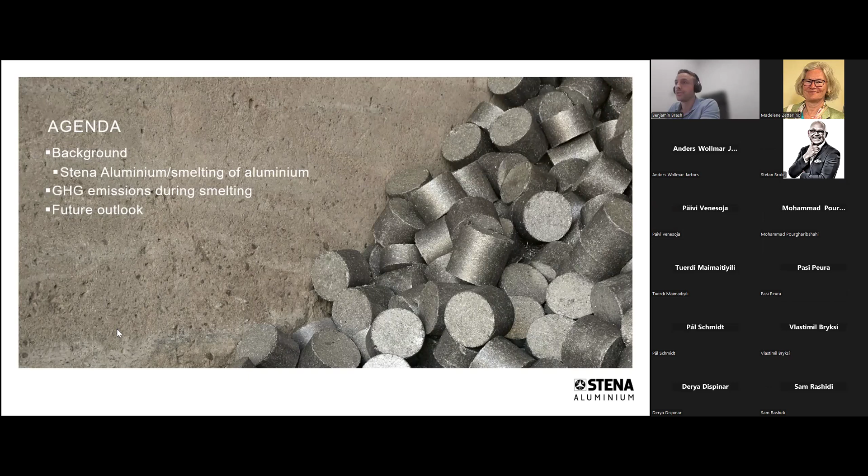First heading into the background, very briefly about Stena Aluminium. Stena Aluminium is situated in Älmhult, in the southern part of Sweden, on old industrial grounds, you could say, so there's been business here for a long time. It was founded already back in 1906. Back then it was not aluminium, it was recycling of textiles and other materials, but it's been doing aluminium since 1949, so also quite for a long time.

It has not been owned by Stena during this whole time. Stena came into ownership roughly 20 years ago, and of course it's part of the Stena sphere, or the Stena group, which also consists of Stena Recycling, which I think many of you are familiar with, but also Stena Line, the ferries, also part of the same group. Stena Aluminium has roughly 100 employees, only one production site here in Älmhult, and that's where almost everybody is situated as well.

What do we do? We do scrap-based production of ingots, which we supply mainly to foundries for high-pressure die casting, but also sand and permanent mold casting. We have an annual capacity of around 70,000 tons, looking to increase this in the upcoming years. We have a permit allowing 90,000 tons annually. Currently at 0.63 kilograms of CO2 equivalents per kilogram produced aluminium, and we will go much deeper into that figure in the upcoming slides, but that's the average value for the whole production.

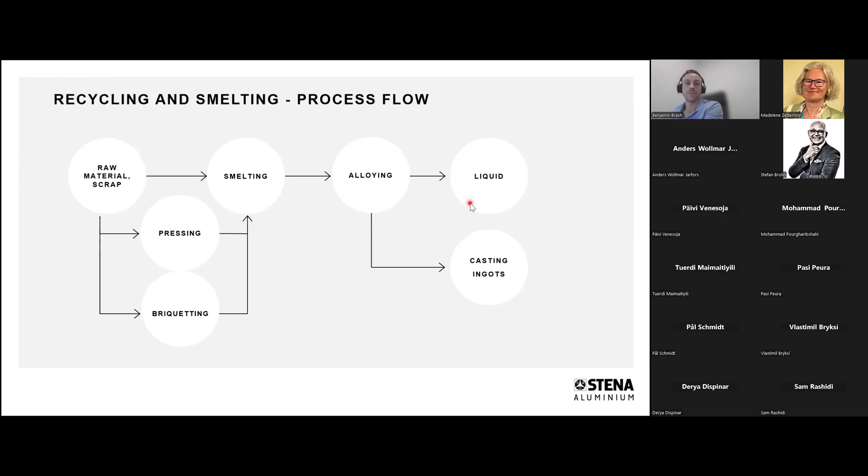We then supply material, as I said, as ingots, so we do casting of ingots. We also have liquid delivery in ladles, and that is also a way to reduce greenhouse gas emissions. It's something that we have, and also some of our competitors down in Germany and Poland. It's quite common to have these kinds of liquid deliveries as well.

I should also say that we do not do so much sorting at our facility. We purchase the material, and it's usually already sorted into different fractions. We purchase the main proportion of our material from Stena Recycling, so it's within the group.

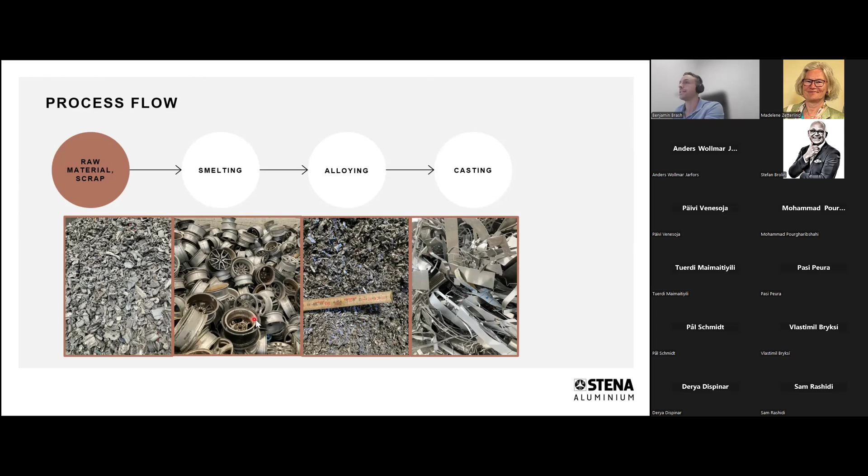So looking more into detail of the alloying step, we need to do alloying, as I mentioned, and it depends on what the customer wants, the alloy spec that the customer wants. It also depends on the scrap mix that you use, because in the scrap mix you start with an alloy composition or a scrap composition, and then you often need to add some alloying elements. It will depend both on what the customer wants and on your base scrap composition.

We do mainly alloys for casting. As I said, high pressure die casting is the main proportion, but also permanent mold and sand casting, supplying to foundries. There you have quite high silicon contents, usually in the range of 7 to 12%, I would say, so quite a lot of silicon. Silicon is also the alloying element that we add in the largest quantities.

Why do you need silicon? Well, during the casting process, you need silicon because you need to have the fluidity and the castability throughout your mold during the casting process. That's why you need these silicon contents.

So looking a bit more into detail of the greenhouse gas emissions during the recycling and smelting process. I should say that we have calculated here according to the greenhouse gas protocol, and I know this is quite a tricky field, there's a lot of different ways of calculating, different standards. But we have chosen the greenhouse gas protocol to calculate our emissions.

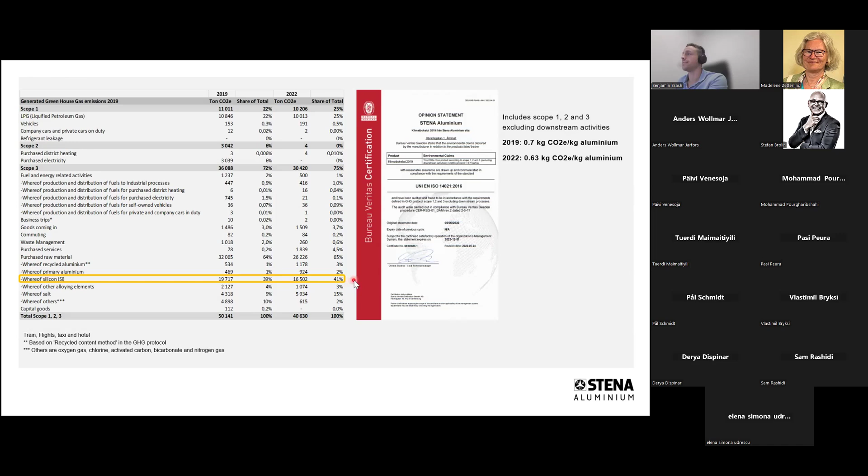And where does those 41% stem from? As I said, this is scope 3 emissions, so they are not emissions which occur in our plant, it's during the production of the silicon. I should say that we also use quite green silicon, there's of course a variety here depending on where you source your silicon. But it's still quite substantial.

And where does it come from? It's scope 3 emissions. So when you produce silicon, you start with quartz or silicon dioxide, and then you have to reduce this with a carbon source, and then you get silicon, but you also get carbon monoxide and carbon dioxide, and that causes the emissions. There's also, of course, an energy consumption within this reduction process. I believe it's usually electric arc furnaces, so there's also energy consumption there, and that you can solve by using green energy, but the reduction process itself is a bit more tricky to solve.

There's also an effect on the scope 1 emissions, because if we add more alloying elements and more silicon, we need to use more LPG during the alloying step in the alloying furnace. So there is actually also an effect on the scope 1 emissions, but I would say the substantial part is within the scope 3 emissions during the production of the silicon.

But anyway, when we calculate the total, we get a figure of 0.63 CO2 equivalent per kilogram of produced aluminium. So it's fairly low, and I think usually when you look at these figures from recycling smelting facilities, they are usually somewhere in that range between 0.5 and 1.

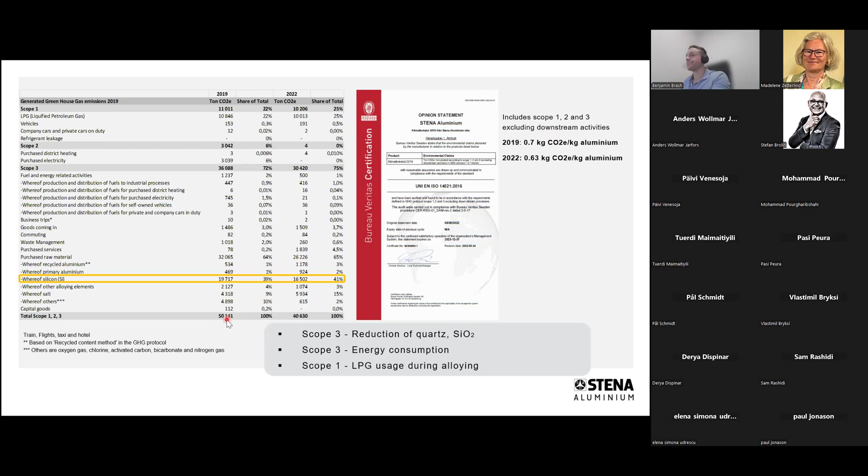So what we have also looked at is the difference between different alloys. As I said, we've supplied foundry alloys, but there's a lot of different foundry alloys. So it's interesting for the customer and for us to know what is the recycled proportion in the different alloys. Here we have listed a couple of different alloys and alloy groups.

Basically it goes from the copper silicon alloys, that's for instance the 46,000 alloy. That is, I would say, the most common foundry alloy today. And there you have a 96% recycled content, meaning that it's 4% primary alloying elements that you need to add.

Or that we add in when we produce this on average. And then it goes down in the lower copper content containing alloys. So this half silicon is, for instance, the 47,100, it's 93%. So the recycled rate goes down a bit, and we have to add a bit more of the primary alloying elements. It's the same 93% figure for the 44,300 alloy, which is also quite common.

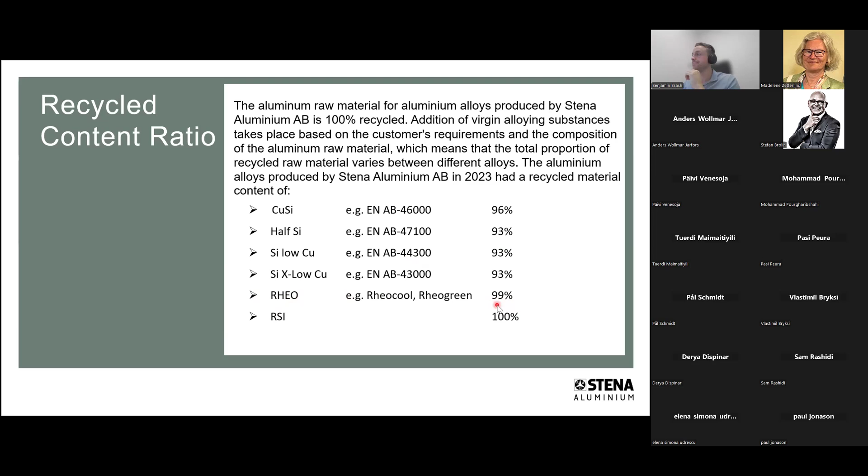We have also recently developed these RHEO alloys, and there's a slide with more details about the RHEO alloys. There we have very high recycled content, so basically we have to add very, very small amounts of primary alloying elements. That's how it looks when we look at the different alloying groups.

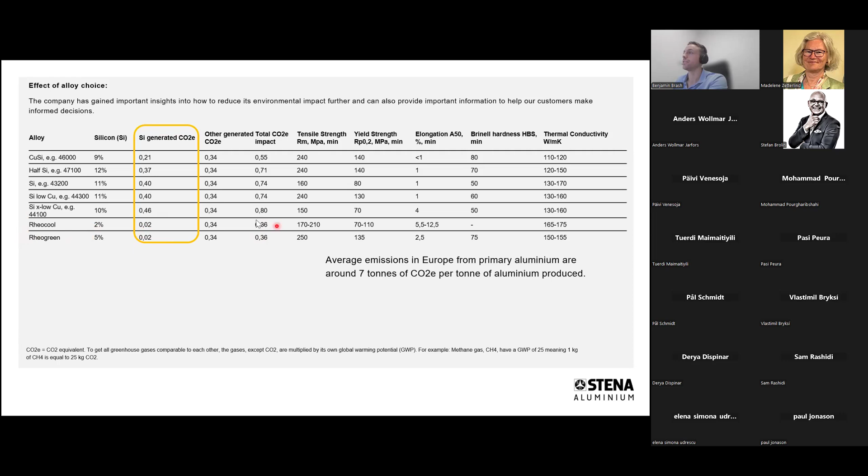So what have we done, and what is possible to do to reduce these alloying greenhouse gas emissions? Well, the first step is, of course, to generate this kind of data to be able to make an informed decision for the customer, but also for our sake, to know what are the emissions in the different alloying groups. So the generation of data is the first step.

Scrap recipe optimization to reduce the need of alloying. When we produce, as I mentioned, we have a lot of different scrap types. By choosing this wisely and combining the correct type of scraps, we can try to get as close to the final alloying composition as possible when we choose these different scrap types. This is something we have worked with for a very long time, but always trying to improve and get as close as possible to the final alloying composition, using only the scrap.

As I mentioned, RHEO alloys with low silicon additions—these are alloys with, as it says here, 2 or 5% silicon final content. So it's very low, meaning you don't have to add basically anything. Very low amounts of additions, which also means low total emissions.

Circular material flows is something talked about a lot, and we are working with circular material flows as well, these kind of closed loop solutions, and we're always looking for more of those solutions. What's important to mention is that even though we are working with a lot of these closed loop solutions and circular material flows, there is a supply and demand mismatch when we look at the silicon addition.

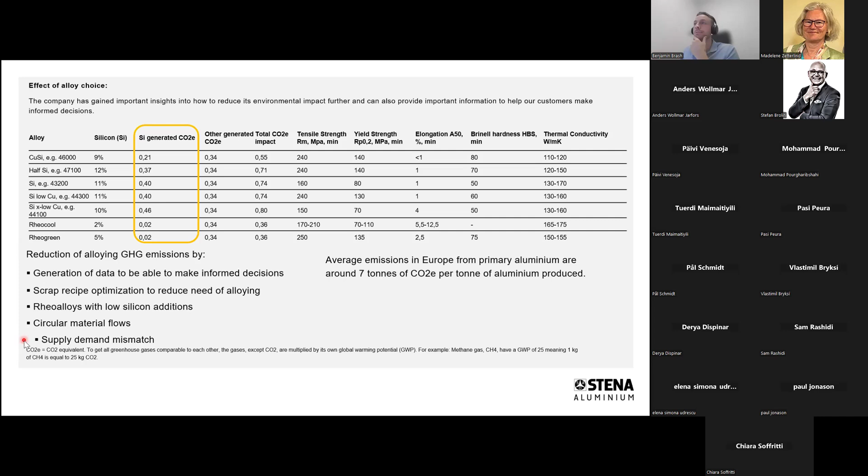Just a short slide with some information about RHEO alloys, since it's maybe not something everybody is familiar with. In short, Rheocasting means it's a semi-solid casting process where you're using a slurry when casting, and this allows for a very low silicon content. Usually you go between 7 and 12%, but with Rheocasting it's possible to go much lower, maybe 2, 3, 4, or 5% silicon, and it's still castable. That means very low silicon additions are needed, so significantly reduced need of alloying.

At the moment we have two RHEO alloys that we've developed, and we're looking at developing more. We have Rheocool, which is basically for thermal management—it's very low in a lot of the alloying elements, meaning good thermal properties. Rheogreen is more of a replacement for the 46,000 alloys, and it contains some copper.

This process has numerous advantages, of course. Two of those being increased tool life, and also the possibility to cast with a reduced machine size. So there are economical benefits to the process as well as technical benefits.

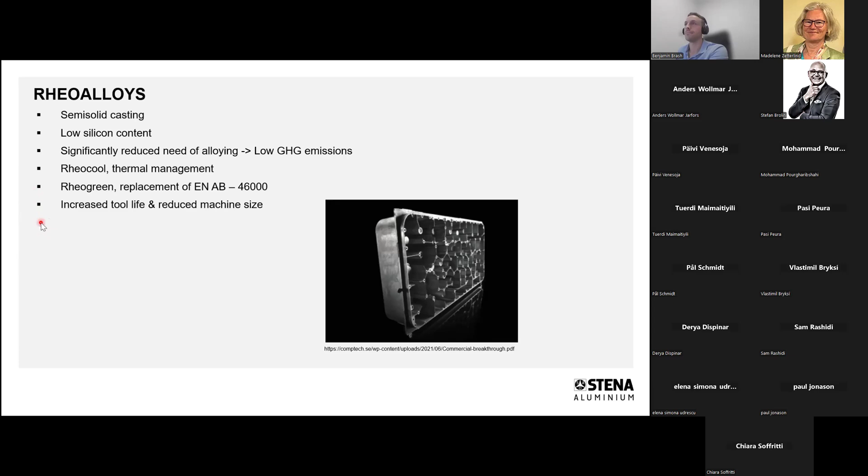So, briefly, let's also look at the future and what it holds. There's obviously a lot of aspects affecting the need for alloying, the main one being supply of scrap—how much scrap is available on the market, and what's the composition of those scrap types available on the market. One thing which affects this is the lifespan of products.

Aluminium is quite good in the sense that it's very durable, and if you look at the automotive sector, we have quite long lifetimes for the product. But that also means, for instance, a lifetime of 15 years for a car means that the scrap from the automotive sector available today is actually the volume that was produced 13, 14, 15 years ago. The demand for products and alloys is, of course, also important.

What kind of alloys does the customer demand today, and what will they demand in the future? I think Anders will talk much more in detail about this demand question, because it obviously affects what kind of alloys and alloying additions we need to do. The share of material being recycled is also important—we have quite high recycling rates of aluminium, and it differs a bit by sector. But can we increase this? That would be good, of course. Legislation and policies as well.

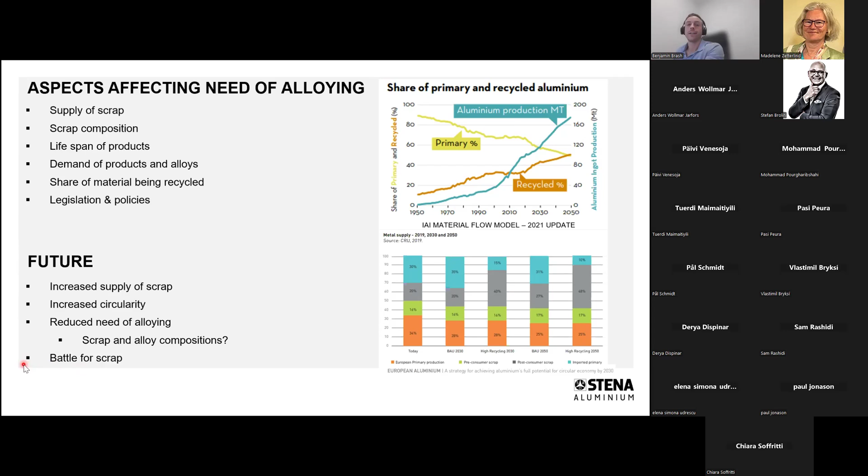So what will happen in the future? Most likely there will be an increase in the supply of scrap, which is what these figures show to your right, along with increased circularity, which is talked about a lot. Will there be a reduced need of alloying? It will depend on the kind of scrap available, and also what alloys are actually requested by the customers. What we are definitely seeing already is that there will be more of a battle for scrap in the future, since a lot of primary producers are also switching over and looking at more secondary-based products.

So how will we move to increased circularity and an increased supply of scrap? There are a lot of things brought up in the circular aluminium action plan from the European Aluminium Association—circularity, making it easier to identify materials when recycling, easier disassembly. Improved collection and sorting is talked about a lot, meaning you can separate these different scrap flows into more specific alloy grades. There's some scrap being exported today, but that will most likely change in the future, keeping scrap more in Europe. Alloy development is also important—Rheocasting is one route, but also making more tolerant alloys that can use a broader scrap base.

So just a couple of conclusions. A significant proportion of the emissions during the recycling and smelting of aluminium stems from the primary alloying elements, as we've seen, mainly silicon. The need for these primary alloying elements and the greenhouse gas emissions will depend on the scrap used and the alloy being produced, and we're seeing some differences between alloys. RHEO alloys have been developed with the lowest greenhouse gas emissions, at least in our product portfolio. And we're seeing an increase in the share of recycled material and recycled production in the upcoming years, at least according to these predictions.

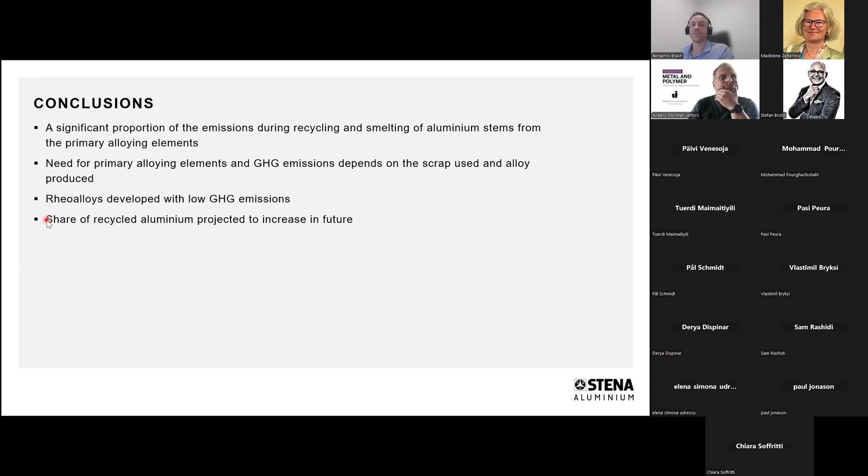Thank you very much, Benjamin. That was a very, very interesting and very good talk, and it matches very well with what I'm going to talk about. Thank you. I presume that you can see my screen now, or at least very shortly.

Yes, you can see it perfect.

I will present work that we've been doing here at Jönköping University, together with my colleagues Toni Bogdanoff and Lucia Lattanzi.

The topic is functionally integrated castings for body in white applications and the consequences for material use and mix in automotive manufacturing. What I'm going to cover is a review of aluminium usage in the automotive industry.

Thinking about Benjamin's presentation and the scrap sorts shown in the beginning of his talk, the leftmost image showed the Zorba scrap being sorted into the aluminium fraction, and that first fraction, the automotive part, essentially ends up being the body in white and some other elements.

What we will do is take a look at that portion of the material and examine the consequences for electrification and for the use of mega casting, because there is a change taking place in material usage.

As Benjamin said, we have a scrap mix today, and what will be needed now and going forward is different, and what will be returned is also slightly different.

So we are looking at the automotive sector and that portion of the material flow, taking a global perspective, and looking in Sweden, we have rather large efforts in this activity.

There are new foundries being set up with an annual requirement in the order of 55,000 tons per year, so it's a rather sizable effect and consequence from the automotive industry on material circulation.

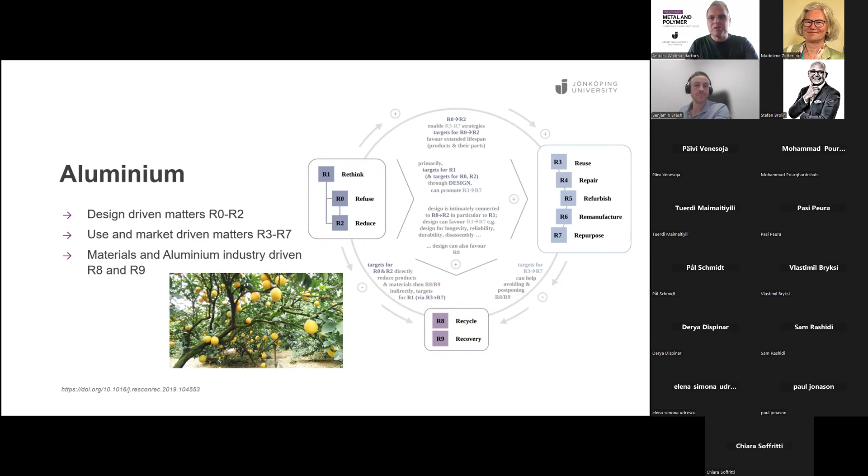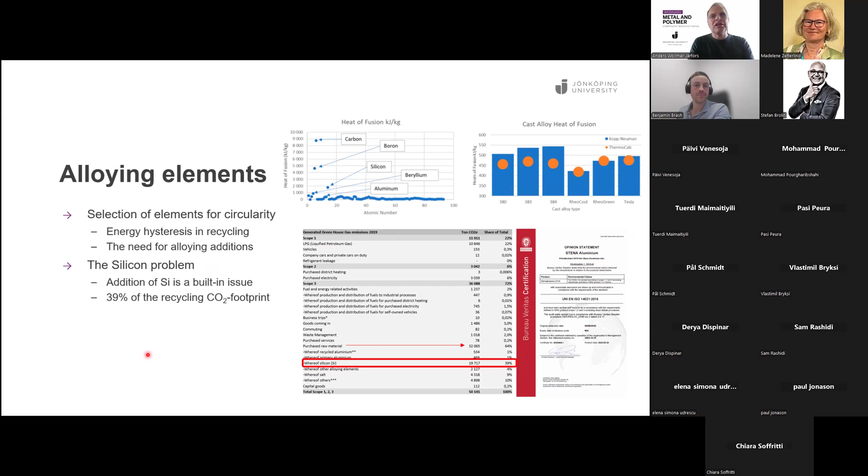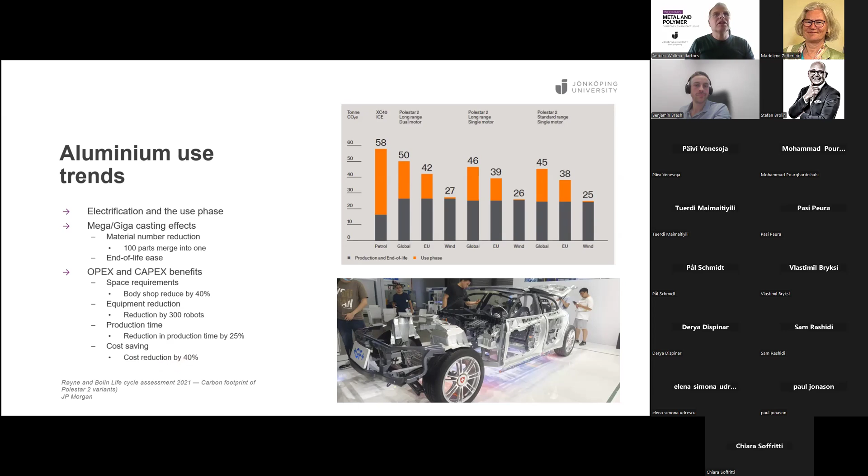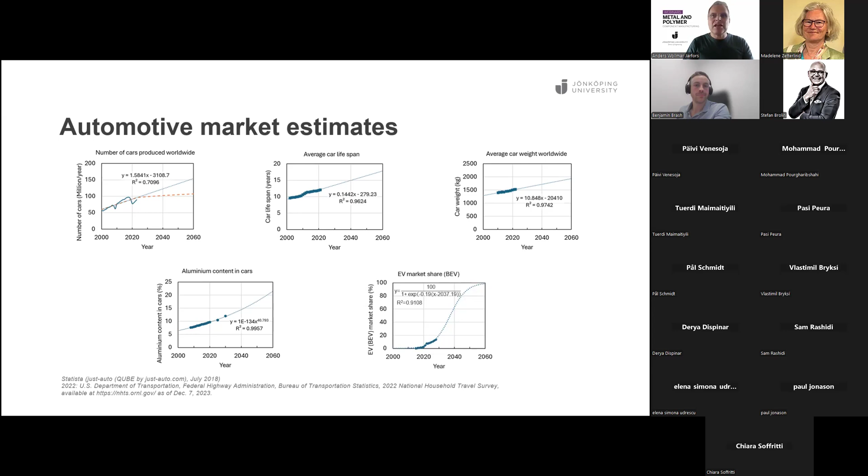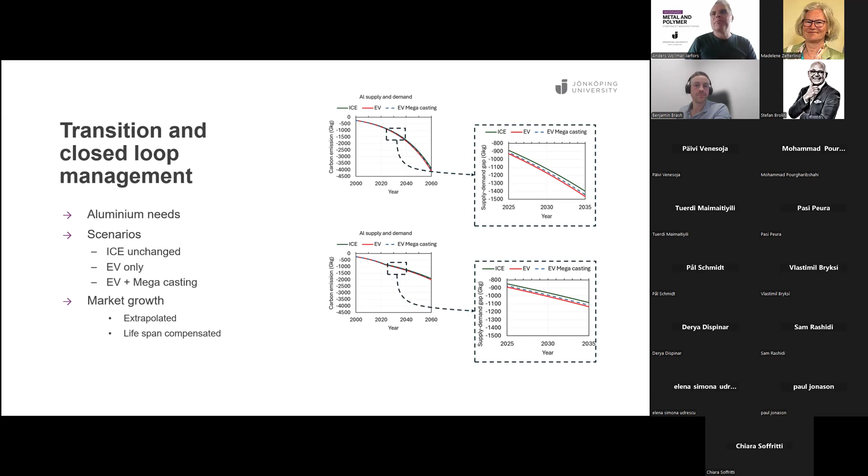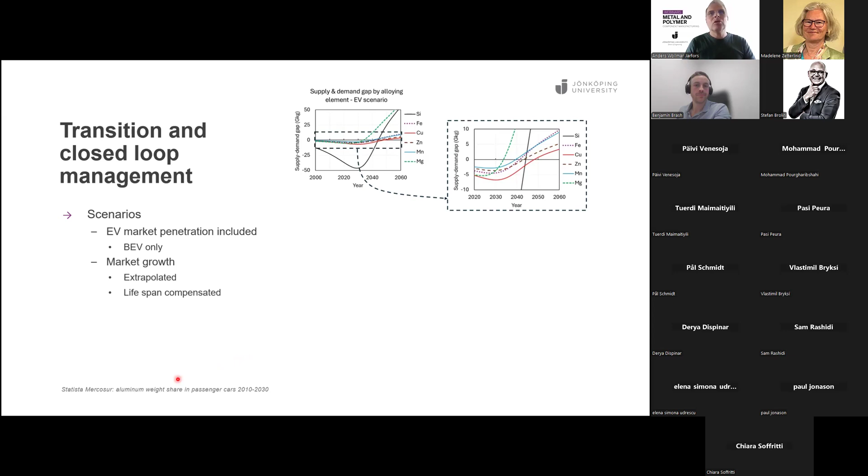Because if you can match your alloys, which is one of the challenges Benjamin mentioned, you would actually have enough alloying elements in the scrap coming back. You would only have to work with that mix and add aluminium in the right proportions. But that requires enough understanding of what actually comes in, how it's sorted, and what we can achieve with that mix.

So how good are we in using the scrap in the mixture? We can take the next step also, which is when you reduce the requirement of the cars, the lifespan compensated part, it's essentially the same scenario, but the drama in the transitions is not as big because the volumes are less. So now being able to use the scrap...

The electric vehicle uses quite a lot of sheet metals and extrusions right now, and that is a challenge when you do recycling. The ability to match is much more difficult with wrought materials, because of the manufacturing processes, which are much more sensitive to variations in chemistry. So if you think about the actual matching, the addition of mega casting would make this transition a little bit easier, because the casting processes are more forgiving when it comes to alloy variations, and the productivity in the process is not as sensitive as an extrusion process or a rolling process would be.

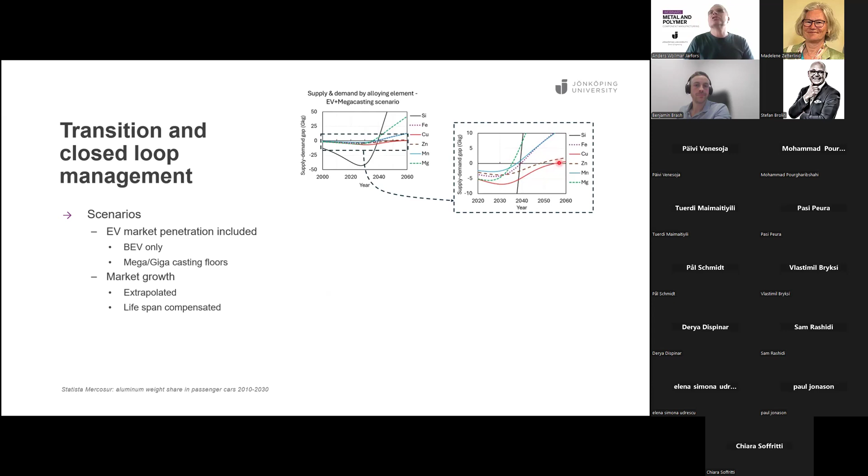Now, taking the mega casting into account, the scenario is the same. There's a little bit of a difference, because the balance and the feedback of silicon will be higher further down the stream, since you have more scrap with higher silicon contents. But it's essentially a similar scenario: starting with magnesium, then manganese and silicon and iron transitioning here, where you will have an excess of that. The alloying elements further down are zinc and copper, which will be the last ones to transition into a surplus. So that tells a little bit about what type of alloying elements we will have.

And if you reduce the growth of the cars, it's similar, because the actual way that things are changing is not as dramatic. You can see there's a little bit of a plus just around 2040 sometime, where all the changes take place. Now, all these things have consequences.

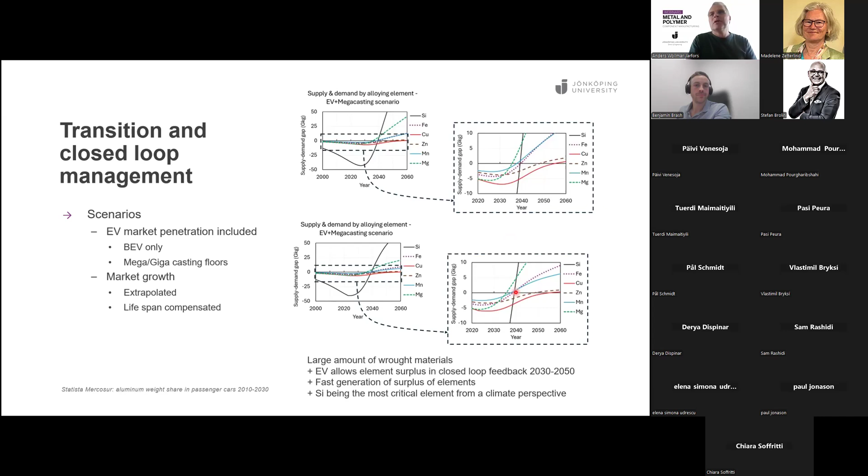With the continued growth of the cars, you can see that the electric vehicles will change, and this will sort of reduce it. Then if you add on mega casting, because you come into balance a little bit earlier, we end up with this type of scenario here. So just before 2040, we will be able to remove and change this. So these are the happy points here.

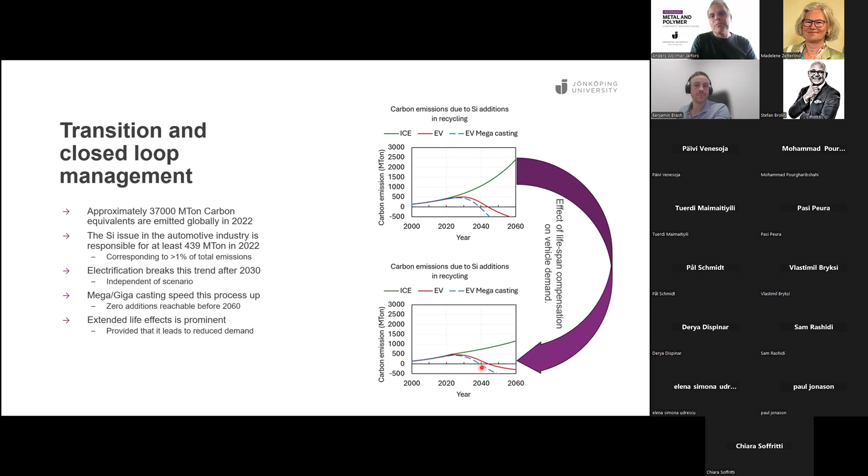Taking the slightly reduced market change, we can see that the amplitudes are lesser, but it is obviously possible to come to this negative portion here. So there is a potential solution to the silicon problem in the automotive industry, and there is a potential to close the loop and have enough alloying elements to actually produce the cars using the scrap, at least on an overall balance.

In terms of conclusions: the general balance and the EV transition. Without the EV transition, we will just have a galloping carbon dioxide footprint and a galloping resource need. So if we try to close the loop, it will be possible with the electric vehicles. The challenge is essentially to be able to use the scrap to turn it into wrought products. If you take the mega casting effects, that will generate a positive supply balance for the elements.

There's a slightly different sequence with mega casting compared to wrought materials, where the balance for manganese and magnesium—well, magnesium is first in all cases, but the balance for manganese is slightly different, and the casting process is a little bit more forgiving. So if one wants to be able to close the loop, mega casting offers an attractive way to close the loop here.